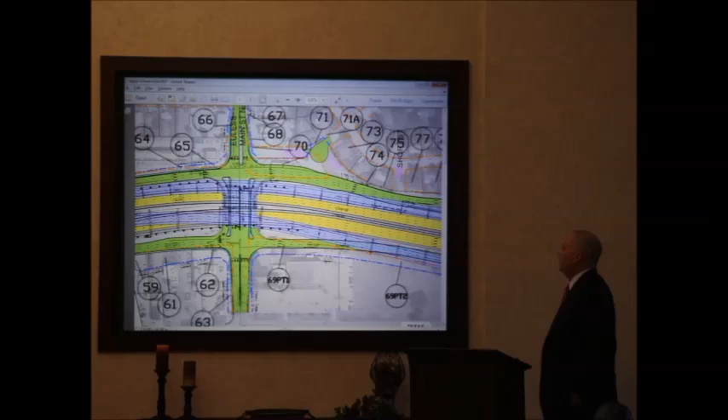Adam, can you go to the schematic for me, please, sir? So we are going to start, and actually, Adam, go back to the west for me, get me to 157 so we can start at 157. That's the second route. Go to the first schematic. There we go. Okay, so we're going to start here, and I brought my trusty pointer,

which is actually a golf club that Jim Moy gave me a few years ago. He said it'd put some pop into my drive. But it's going to work as a pointer today.

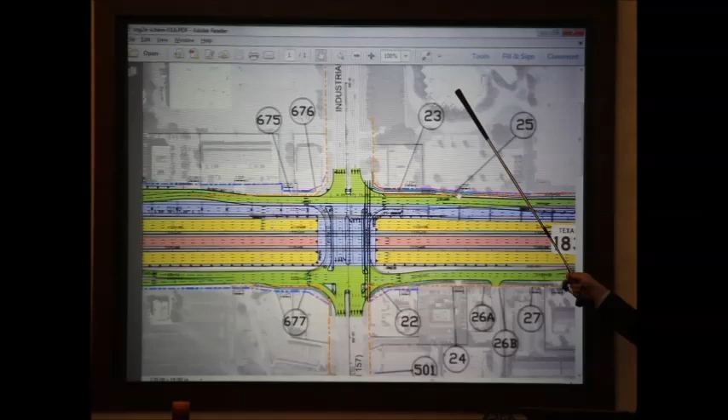We are at 157 and State Highway 183. This is First Baptist Church in Euless. So just to orient you here, parcel 22 is Taco Cabana. Parcel 677 is the cool zone, and that's where we're going to start. Currently, the cool zone has 4 driveways, one in this location, one here, and one a little bit further down, 157. Where you see the blue line is where right-of-way is going to be acquired from that property.

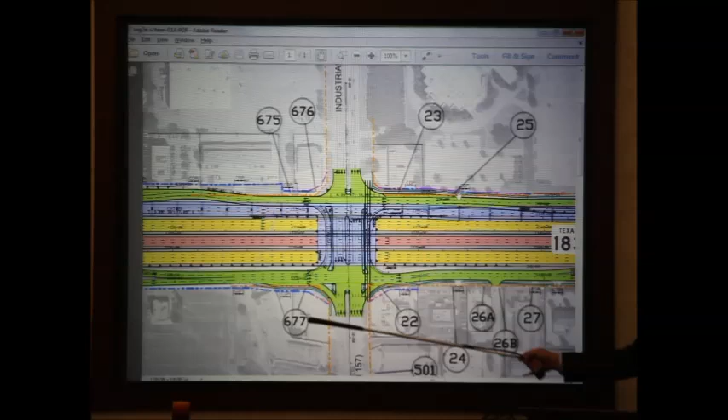As such, TxDOT's proposing to eliminate the driveway here right at the intersection, which we would agree with, it's an unsafe driveway. And they'll also eliminate the driveway here closest to the intersection. But where you see the control denial point access, that is their only remaining access to the State Highway 183 frontage road. Again, Southgate will tell you that they inherited that control denial point from the previous iterations. And so the city's comment here is we're asking them to look at that, and that falls into what we call that yellow bucket, which is they're technically showing that to be closed, and we're asking them to reevaluate that and leave that open.

The obvious reason is we want that property owner to have access to the freeway frontage road. He currently has 4 driveways. We think the way this will play out is, again, we'll make our comment there. And then this driveway down here falls outside of the project. And so what they're telling us is that will be back to local control. So there will be no reason for this driveway to be eliminated. So this property owner in that scenario would still have 2 driveways, one on 157 and one on this freeway service road.

22 Taco Cabana, they've got their access here off of 157, but you can see this key access to them off of the service road is marked to go away. We have visited with Southgate about the fact that those folks worked with the Tarrant County Office of TxDOT when they built that property here recently to basically allow for the freeway construction. You will see that they're taking a little bit of right-of-way, but the right-of-way was planned to be taken, so it doesn't affect their parking calculation or their site circulation. Obviously, closing this driveway would be very, very detrimental to them.

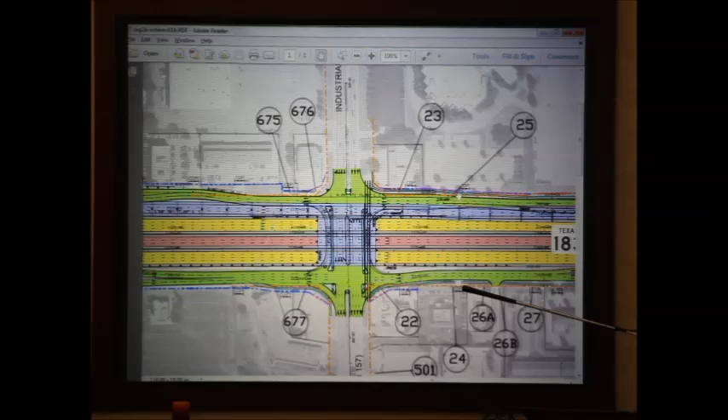If you move here just a little further, and I'll try to go through these pretty quick, I want to point out this very first one here at Denny's. You'll see the CDP again, but it's not where it affects a blue line, and that is because it's a leftover from previous iterations. So there is no issue here. That driveway will be left open. The driveway here that serves Starbucks as well as Home Depot will be left open. And I'm going to slide this thing down just a little bit.

And start back up here at the former La Quinta, which is now the Motel 6. That driveway access would be left open. Lot 28 is going to be the next city comment.

This is the Microtel. They have 2 driveway access points onto the service road. This driveway access point will remain. This driveway access point falls into that category where we're asking them to evaluate the appropriateness. And the reason for that is the shifting of the on-ramp is such that this driveway, we're pretty sure people will try to actually cut across and hit the on-ramp, and that will not be a safe situation. So that has slid to the east, causing that issue.

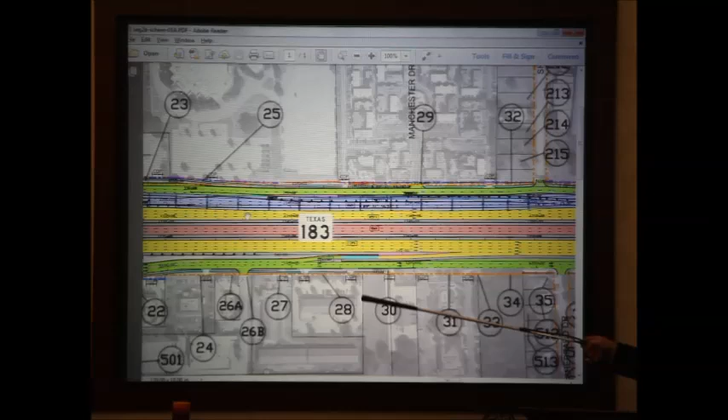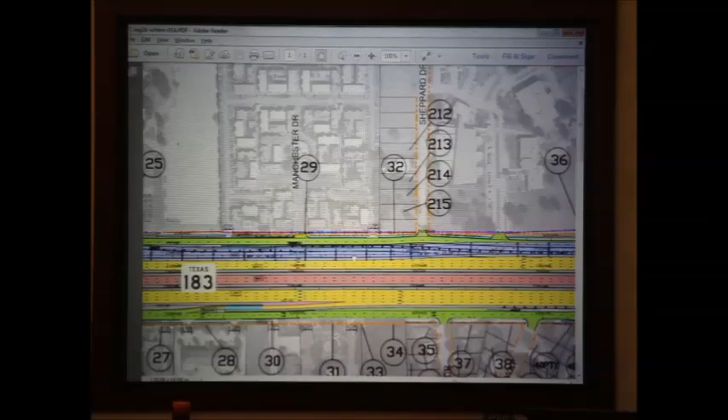This property, because there's a fire lane fully circulating it, can be served by a single driveway, and again, it remains their freeway frontage road access as they've always had. So we're just asking them to reevaluate the appropriateness, and again, when we say that, what we're really meaning is safety of that driveway access right there. There's really not much other effects there south until we get a little bit closer to the corner of the frontage road and Ector Drive. So let me scoot down there.

First thing we run into here is on 42A, which is the Domino's and the Radio Shack building. There is a driveway currently in this location and then here on Ector Drive. This driveway is extraordinarily close to the intersection, but also to, is that Ridgecrest Drive right there. And so they show that driveway to be denied, and we're asking them to reiterate that and look at that. I think that is one where

we're asking them to evaluate the appropriateness of it, but this property, if you see the blue line again, will have right-of-way taking that they'll go through with the property owner, and that will really, really affect that property. It does not actually touch their building, but what it does is it takes away their parking, and they will not be able to park that building for city regulations. In addition, it makes the building too close to the front and side yard setbacks.

And so Southgate will tell you, and there's a little bit of different category, that it may end up having the effect of a full taking on that piece of property. And so really what we'd like to do there, if that's the case, is work with the property owner to reevaluate what's the best way to access that property.

42B has a driveway which actually will be allowed to remain, but there may be some sort of chance that you could combine these two driveways. There may be a way, it's just going to be very, very difficult. If you're familiar with that area, that driveway is so close to the intersection. Just for point of reference, the design standard that TxDOT uses is that you cannot have a driveway within 350 feet of the intersection.

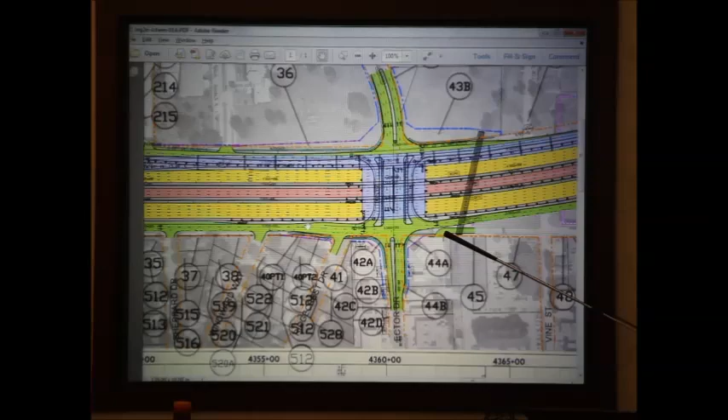Anybody turning here or making these movements is going to be looking at potentially a car or headlights right here. It's going to look like there's a conflicting move getting ready to happen. And at the end of the day, you'd only be separated by a curb right here. So we start to wonder about how safe this is, and potentially what that distance ends up being, if that's going to be two back-to-back curbs, could a vehicle with a long nose actually be reaching over into a different lane, even though they were physically traveling in their lane?

So we've spent some time, and I'm going to scoot down just a little bit further. The city staff has spent some time trying to evaluate the totality of, I would say, 44A, 45, which again is the vacant lot now, 47, and kind of this 48, 49. And it also relates into what we're going to talk about here in a minute on this vacant property up here next to Carl Auto Care.

So, one of the things that we've looked at and that the staff would like to make a recommendation is, because this building is going to be completely damaged out, when you start to look at what that does to building setbacks for future construction on something else coming in there, you start to really get pinched on this side. It's hard to tell here, but you can see this drainage coming there, and that is an open drainage ditch, which you could cover and build flat work parking over, but you cannot build a building.

What you start to look at is that there are some things that may have to happen here. This is either going to have to be a significantly smaller structure, a different use. Potentially, the owner of this property could combine it with the vacant property here, or the owner of this vacant property could buy that property. There's some things that could happen where you could meld two properties into one more developable lot. We think, as we talked about earlier, that there needs to be some access from here onto that property to allow for somebody to even access that from the freeway frontage road.

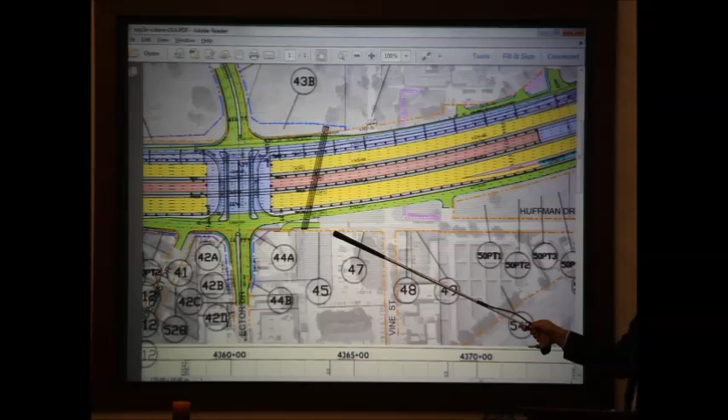So when you start to look at how all that functions together, what the staff has looked at is making a comment that right here where the hand is, the access point to the two hotels, that would be extended to the freeway frontage road. What that does is give both hotels direct access from the freeway frontage road for anybody looking to go to those hotels. This driveway coming out of this property, which again will be heavily damaged, would simply be eliminated. Access to this property would come from the mutual access drive, and what we believe the greatest potential is, again, is for these properties to be combined.

The driveway that comes in to service these two hotels is already constructed and platted as mutual access to lot 45. So that one driveway serves the properties here. What that would also allow you to do is Vine Street, per their plan, and they don't show it here, would be reconstructed back to about this point. So Vine Street would continue to go all the way out to the frontage road as it does today.

That gives Republic Tire and those guys down in that area the same access that they have. It gives Kerry here at the insurance office his same access, doesn't change anything. What that would potentially do, if you extend this driveway out, is it would allow the city, if they wanted to get rid of this portion of Huffman, to in essence create a new front door, if you will, to that hotel property, which when you kind of step back and look at it, we're just trying to say what point does that serve.

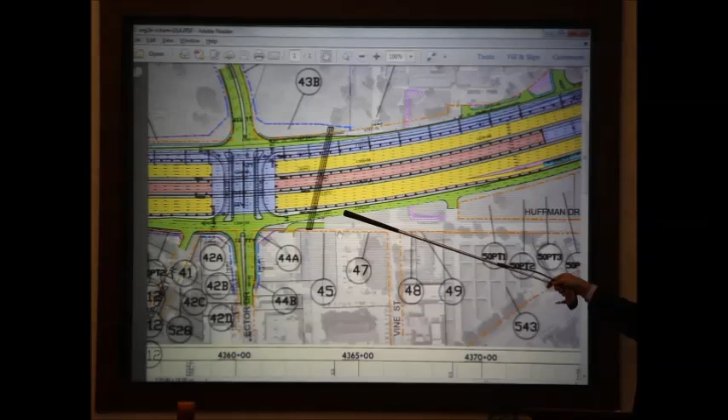So imagine this driveway coming all the way out. You still have Vine Street. Vine Street is your circulation here, and again for these businesses. This piece circulates nicely all the way out to the freeway frontage road. This purple piece represents the existing skywalk to the junior high. That is going away, and so that is no longer going to be there.

You may remember that in early iterations, the right-of-way line cut through Whataburger much more severely, cut through Taco Cabana, cut through Paro Auto Care, and actually came down about like this. What it did is it cut all this vacant property in half and did not leave you a developable lot on either side. It left TxDOT right-of-way on one side and too small of a lot to be developed on the other side. The staff worked with Southgate when they did their realignment.

And because Southgate took this in a little further, and because we asked them to relook at Byers, what they were doing at Byers in the original design was, I don't know if you're familiar with the North Tarrant Express project up by the Church of Christ in North Richland Hills. There's kind of what I call a canyon looking up that. It's got these huge retaining walls when you're just trying to access their parking lot. That's what they had designed here.

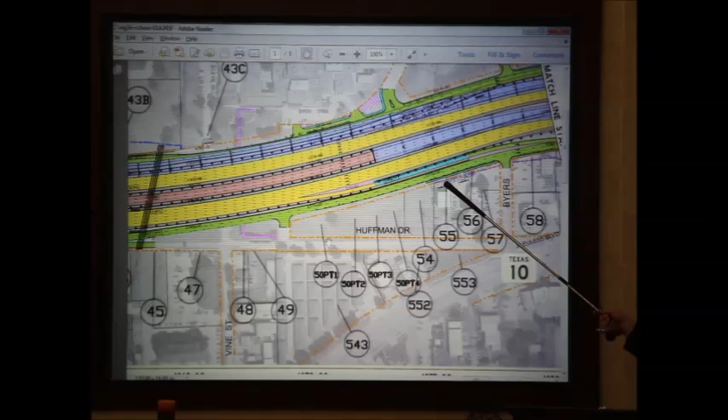Paro Auto Care is now unaffected and gets to stay, so again, one of our comments here is that we'd like to see that driveway remain. This gets into why it was shown as denial of access, because back when these properties were being totally taken out, there was no access needed. So we would ask for these two to remain.

What we are asking for in this piece, which is 50 PT 1, 2, 3, 4, and 54, is that TxDOT would agree to work with the city at a future date to allow new driveway permits to that property, and the city would commit to, in essence, master planning that so that you don't have multiple driveways. Probably in that distance, I'm going to guess that you have 2 driveways. This is not unlike what we've done in many places in the city. 157 at the new Dairy Queen, instead of having a driveway at Dairy Queen and at each additional lot, you've got a mutual access fire lane that's got 1 or 2 points of access.

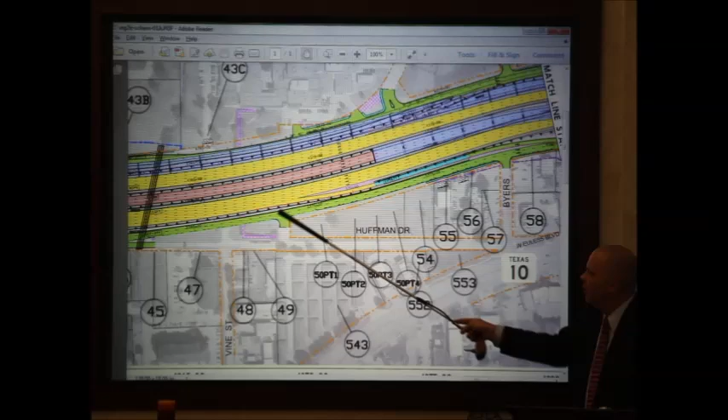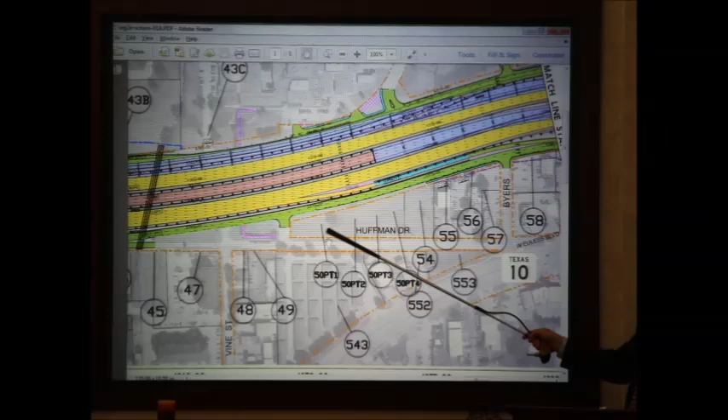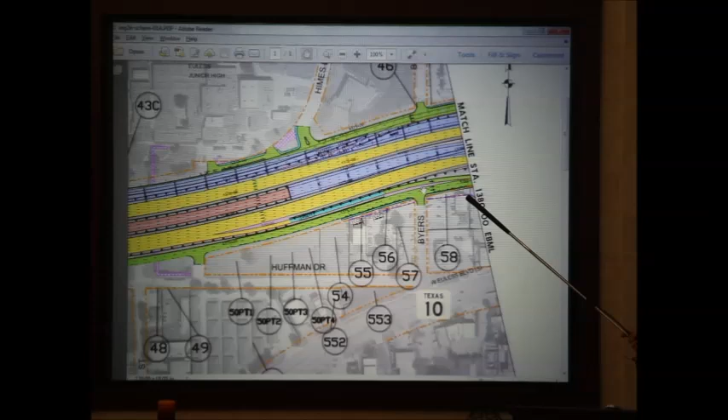This is where the drawing gets a little odd because in one of our most critical points, we have the match line that moves on to the next sheet. So if you look at 58, this is Kentucky Fried Chicken. There's nothing at all going to happen to them. Whataburger will still be a complete taking. You can see the line that actually goes through the building. They will still have their access off of Byers, but the building itself will be a complete taking and be torn down. Adam, can you switch to the next sheet, and we're just going to continue on.

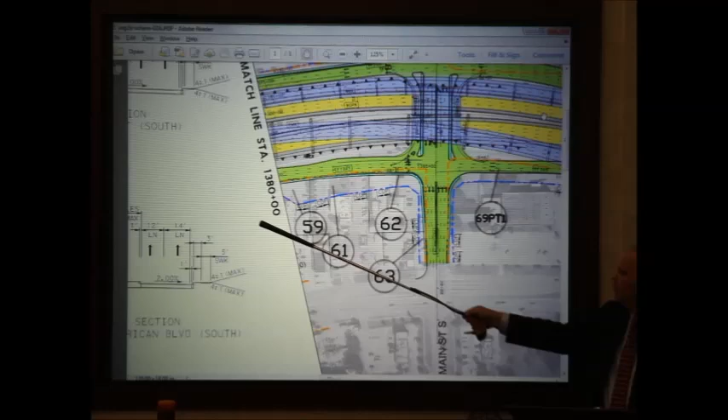Reposition this just a bit. Okay, so Whataburger was just off the screen here. So 59 is Long John Silver's, McDonald's, and 7-Eleven. Between 7-Eleven, McDonald's, Long John Silver's, and Whataburger, there are 7 existing driveways in that very short distance. Basically, none of them meet the criteria.

So what our comment to TxDOT is, and what we've worked with them on, and it requires you to maybe speculate a little bit, is: let's don't arbitrarily go in here and make driveway decisions not knowing how this will redevelop. If you saw at the public meeting, there was a note they had put on the plan that indicated that TxDOT would work with the city and the property owners to locate mutual access driveways there in such a way as to serve all the properties.

The key is, we're not going to have 7 driveways back in that short distance again, but we want to optimize the driveways in a way that you don't put any one property owner at a disadvantage or an advantage as the market recreates these areas. So if you think about Whataburger, it's going away. Mike has talked with the Whataburger folks, and they have a desire to stay in that area. So they're going to be looking at the general area and saying, we've got this land, is there something else we could potentially purchase and reorganize?

We know that the word for many years on McDonald's has been, and of course they own land all the way back to Highway 10, that they would simply rebuild their building further to the south and shift that. They've got 2 driveways now, both right in, right out. Could they potentially function with one larger driveway in the middle and not have any ill repercussions? So the city comment there is not going to be so specific as to say we agree, we disagree, yes, no. What we're saying is let's work smarter, not harder, and agree to work with everybody in the future to figure out the best alignment for the way that property redevelops. There's just so much unknown as to how that property will redevelop.

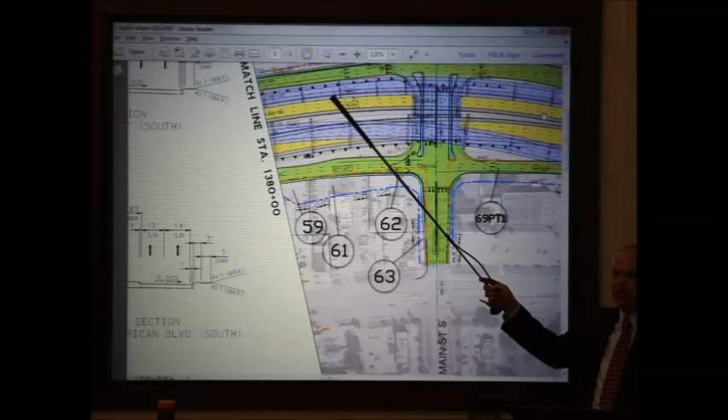Long John Silver's is a complete take. The line goes through the building. I think, Mike, they have indicated they're not 100% sure what they're going to do. They do not have the property behind them where they can, like McDonald's, simply scoot back and rebuild if they want to. Mr. Huda, who owns this gas station here, his canopies are going to be a take, and his fuel tanks, I think sit right here, are going to be a take. So it is highly unlikely that he could maintain a fuel service there. Maybe some other business could happen there, or maybe it has to be combined with another piece of property.

Sometimes when you see highway projects, they will put driveways that at the end of it you think, why is that there, it doesn't serve anything? What we're trying to do here is just make the comment, and they have, I would tell you, tentatively verbally agreed with this, that it makes sense to look at how that's going to develop and redevelop and line up driveways that will optimize ingress and egress to all the properties, be fair to all the property owners, and make it the safest that it can be.

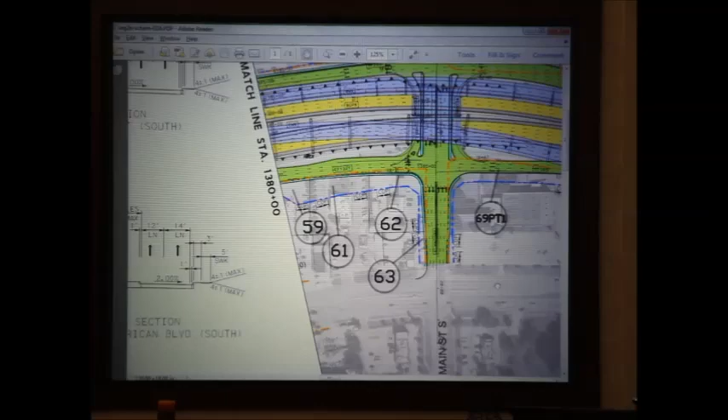The next piece I want to really talk about is the First United Methodist Church here, that is 69 PT1. There is a comment that the city's going to make. There had been some question about how would you access this property if you were southbound on Main Street, now that the design calls for a divided median here, that there's no way to turn in.

What the city did not want is a situation where you had to come to the controlled intersection and turn east on Highway 10 and come down and get into here and try to make a U-turn and come all the way back to the church. It's just kind of an unsafe situation. So what TxDOT is showing is a driveway in this point, and again, it's controlled now.

So what we're asking them is to reiterate what they have verbally told us, and we'd like it in writing, that what they're telling us is they're going to put a driveway in this location that will allow southbound traffic to come to the controlled intersection on the service road and then turn into the church.

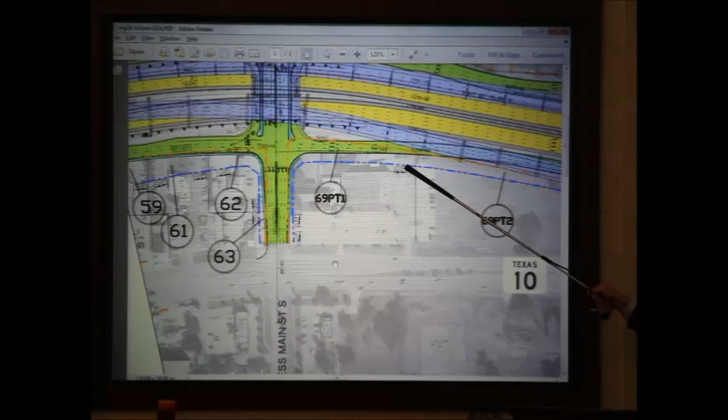Working with the pastor of the church and the building committee, there's some little tweaks to that. For instance, they're showing it in this location, it might be better served to be here so that people don't try to make some sort of a straight cut through to the freeway here. But nonetheless, somewhere in this area, we're asking them to put in writing and reiterate that that driveway would be there. TxDOT and Southgate have both told us that that one will occur because they understand that access to the church.

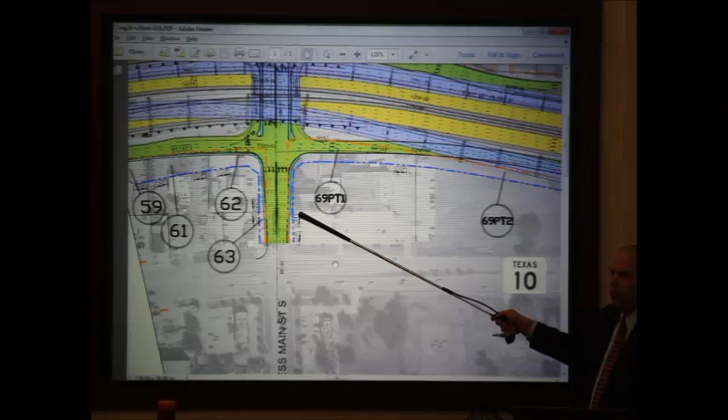The next question I get is kind of on these two driveways that are going to remain, but there will be some different functionality than there is today. You would not be able to turn into this driveway from southbound. You will be able to turn right out and leave. If you were heading back down Highway 10 or if you were heading back up north, then what we would perceive is that you could exit here and head north, and if you're heading down Highway 10, you would exit here and head west on Highway 10.

So we think that this driveway is key to the church as far as how folks are able to get in and out of there. The other thing, we've been working with the pastor of the church, is that Southgate's going to come do a meeting specifically with them to talk about not only that issue, but some of their educational building here is a complete take. Y'all know about the issues with the relationship of the front of the church today to the right of way.

And then the other part is that that bridge, as we reported to you previously, will be out for as much as 18 months. And so we want to have a very targeted meeting with folks. If you wanted to go eastbound on 10, how would, because now you can come out and go across and take a left. How would you go eastbound on 10? You can't do a U-turn there, can you?

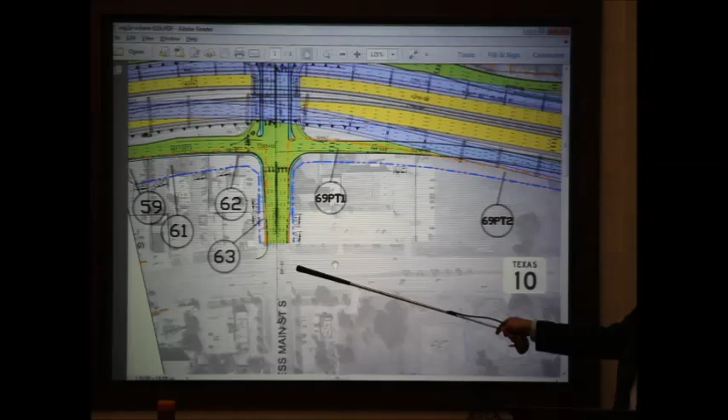It's, let me think here. It's marked as no U-turn. It's not my favorite traffic movement. What you're saying, Tim, now is you can come here and do this. Yeah. But you would not be able to do that because of that controlled median. Yeah. What does that mean, you have to extend so far down? That is a comment that we could make. Here's the fear. The fear is if it doesn't extend that far down, people will do this, make this movement right here.

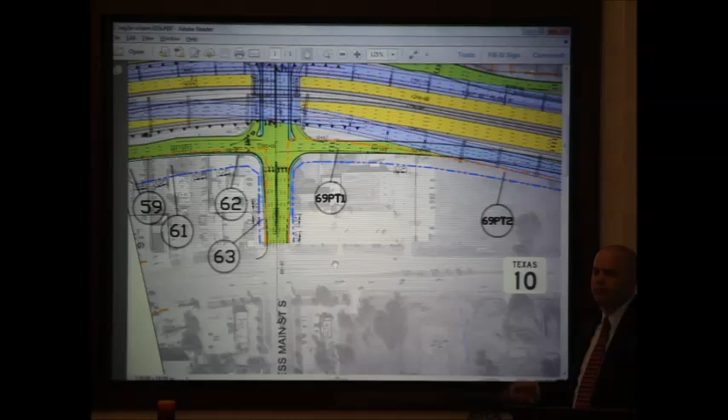And one side of that is that's the movement that's made today. That's what we do today. That's what it's been doing since 1964. But it's because of the distance to the intersection. I think we can make some comments there about that particular eastbound movement on Highway 10. I mean, if you go south on Main Street, it's kind of a weird movement.

They did. And I mean, that may be part of the, back to our time and money comment, but obviously at some point in time, when driveway access can line up with Cullum Drive, that would provide that eastbound Highway 10.

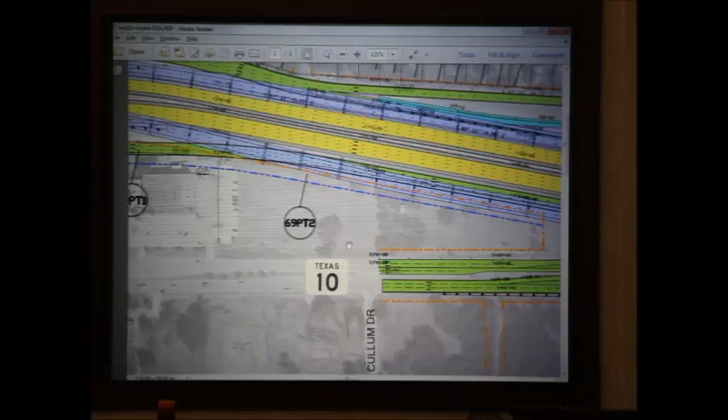So while we're asking questions, what's the grade or the elevation of that service road right there on that drive, north side of the church? It's right now like a pretty good steep. If memory serves me correctly, it's not significantly different than what it is today.

Now, one of the things that's a little different in this schematic that's kind of hard to think about is we always talk about the interim project, and that's what they're building as part of what we know as Midtown Express today, and then the ultimate. And the ultimate is the addition of additional managed lanes. The interim project will have one managed lane in each direction. The ultimate project ups that to 2 and even potentially 3.

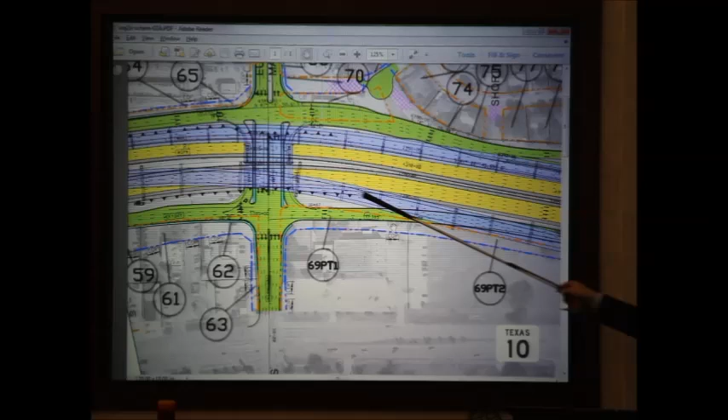What you're seeing in these schematics is the ultimate, because you see these little rectangles here. That's actually elevated structure where the blue lanes are the ultimate managed lanes. The thing I like about that is, as you look through the corridor, what we're looking at is how the ultimate project will affect the corridor.

And one of the things that the city has stressed with TxDOT and Southgate, and we've got them to acquiesce to, is that they are acquiring the ultimate right-of-way today, even though it may not necessarily be needed for the interim construction. And the reason for that is nobody can tell you when the ultimate will be built. It could be 3 years from now, it could be 20 years from now.

And it just seemed in our mind unfair to the citizenry to come in and potentially have acquisition, et cetera, and at some point in time in the future, you would always know that you'd be subject to potentially further acquisition. So this is kind of to pull the Band-Aid off quick one time and take the right of way that you need initially.

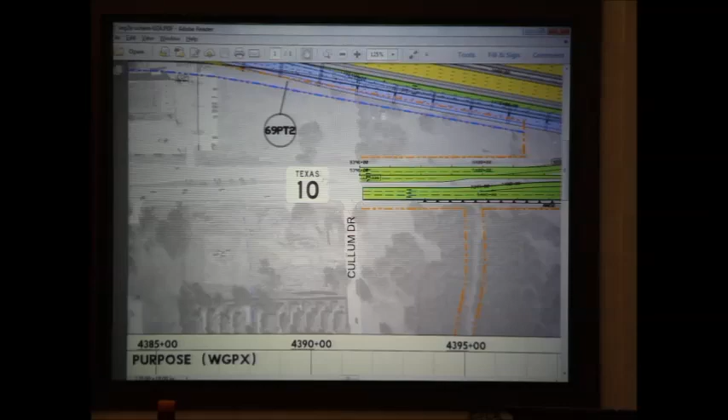Third thing I want to show you real quick is if you come down here a little further, it's easy to miss because this is on the very eastern end of Euless. And one of the things we pointed out to them is they've actually got this label wrong. Aries is actually right here. But in the ultimate, again, not the interim, but in the ultimate, they're showing that to go away.

And the comment that we're making there is Libra Lane here is designed to function with that. It's not designed as a cul-de-sac with, what's the radius these days, Chief? A large radius cul-de-sac. So if you simply took that away and left that as a street, we've got a concern about particularly emergency response equipment's ability to get there. So we're saying, hey, reevaluate what you're doing there in the ultimate versus the interim.

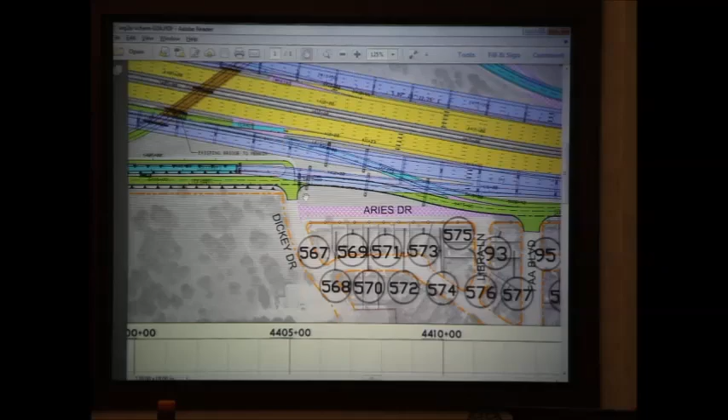If I move to the north of the road, there's a little bit less of an effect for us. One of the things I want to point out here is this is the Riverwalk project. They are going to make a comment and have asked the city to support that comment, and as it is right now, we would do that. Today, you can exit eastbound or westbound 183, and you can exit and come off right here. And this service road is two-way traffic, so you can turn right back and get back to their property.

What TxDOT was indicating in the interim is that this became one-way traffic, westbound only. And so Riverwalk's point was you've effectively eliminated any access to our property short of going up 360 and doing some things. And I guess if you have really good local knowledge, you can exit Main Street, go up Main Street, come down and do some things. But you've effectively eliminated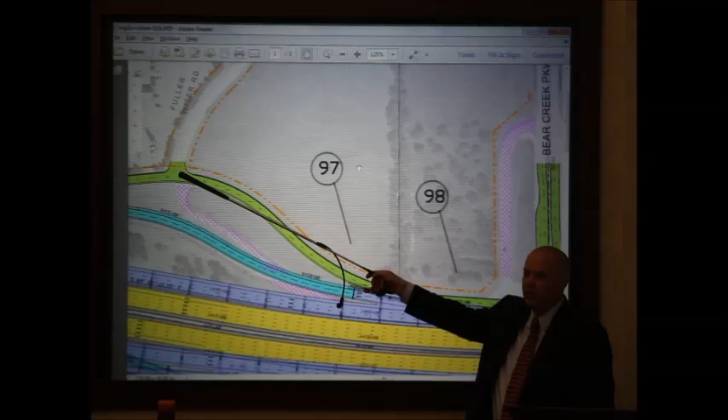access to their property. So what they talked to TxDOT at the meeting about, and again, TxDOT thought was a good idea, and the city would tend to support, is in the interim, not making this service road one-way, allowing it to be two-way from Fuller-Wiser back to the east, which provides access to their property. And from Fuller-Wiser to the west, it would be one-way, and that's because of, I can show you as we get closer to Main Street, how that has to function.

One of the first questions you might say is, well, how do you do that? Well, it's through signage and through a specifically shaped median teardrop opening right there, and then as you took this exit, that's what you'd really be able to do, is to turn back that way.

Now, in the ultimate, it will be one-way traffic, because in the ultimate, there is a flyover connection that allows you to reasonably get to that property, and the Riverwalk folks are comfortable with that. They're just saying, in this unknown interim between ultimate and interim construction, don't leave us where we can't access our property. So the purple hash marks go away. Purple hash mark is indicating, again, this is the ultimate schematic, pavement going away. So in the interim, that exit will still be active. In the ultimate, that exit's not.

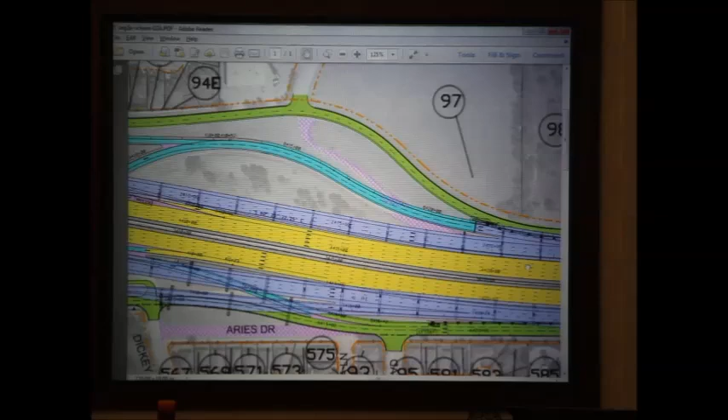Let's see if I can do this a little bit, try to do something. Adam, move me down to Main Street. This thing's got issues. Yeah, that's good enough right there.

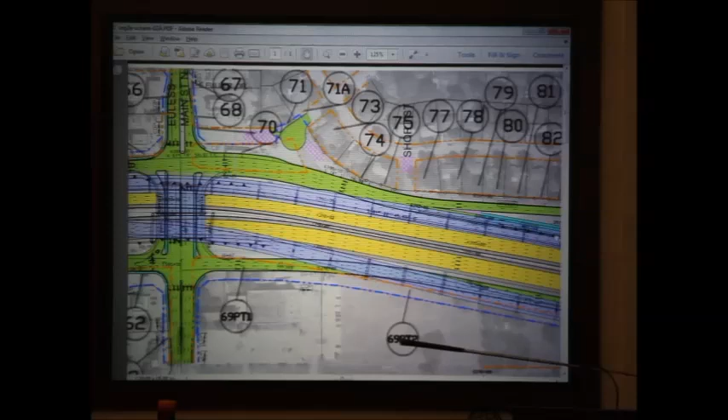So as we discussed earlier, Short Street in this location would go away, and we'd have sound wall placed in this area. 70 is Wendy's. It is a complete taking, and as you see, part of the roadway is actually in Wendy's. This portion of Fuller, East Fuller Drive, is intended to go away as part of that.

68 is Jack in the Box. It gets real interesting. The right-of-way take that they need for the widening of Main Street to line the bridge back up is going to take out all of Jack in the Box's front parking, which is going to put them in violation of our parking ordinance.

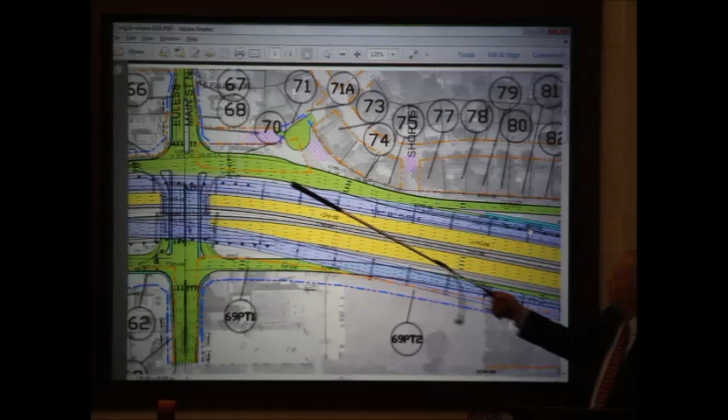In addition, it's going to eliminate their access to Fuller Drive, since Fuller Drive will no longer be there. And that currently is how their fire lane is platted, to a joint driveway here coming down to Fuller. So what the city would be doing is, if your fire lane goes away, you've got to account for that somewhere. They can replat and rebuild a fire lane to circulate the building.

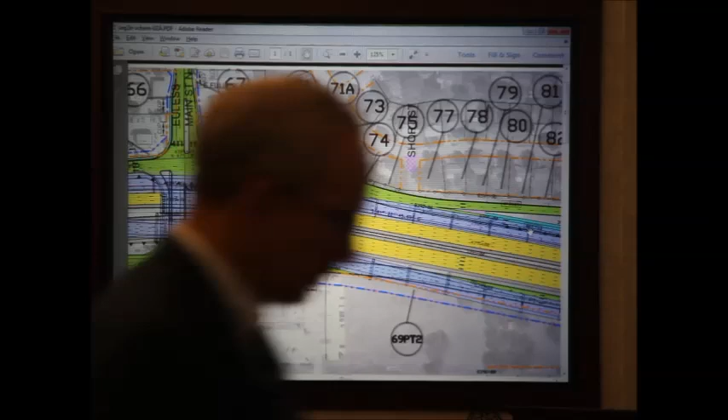The problem with that is, that's where their drive-through circulation is as well. So we don't believe there's enough space there to adequately serve fire lane circulation and drive-through. So I can't tell you what's going to happen to that property, but they've got some pretty good choices to be making there. That's one where TxDOT and Southgate will tell you that it is not a true taking, because they're not taking part of their building, but it's a functional taking.

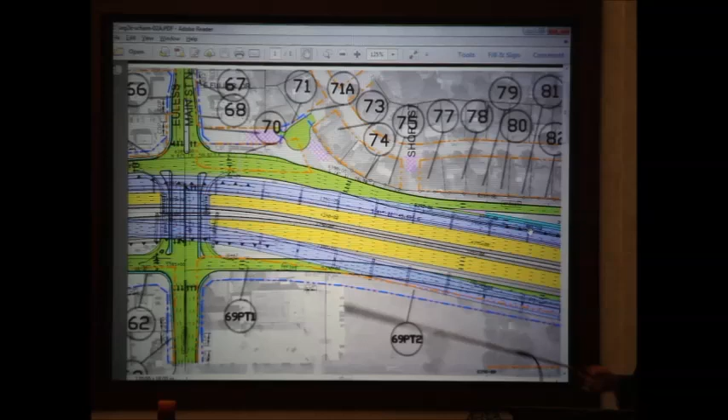The property owner will most likely argue that the effect that you had on my property, I can no longer operate my business for the reasons that I just talked about. So what that leaves you is we believe that there's some opportunity for the market in that kind of general area there to do something differently.

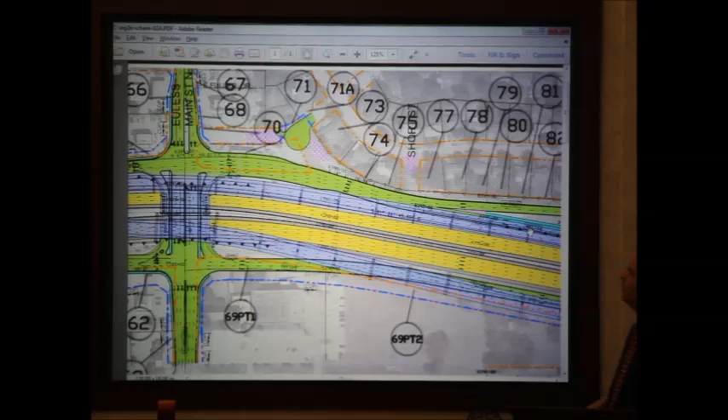We will comment that they will verify that the control access point here would remain open. That's what we would propose, instead of adjacent or straddling the property line of these two properties, and that's as it should be. And we'll go slightly further to the west for me, please. That's good enough. So the gas station here at 66, the Starbucks at 65, and the Motel 6 at 64.

There are two driveways on the gas station, one in this location and one shown here. Our comment there is going to be basically that they're closing one, and we're going to be talking about which one is most safe to close. You would say, well, maybe we leave this one open, but if you remember, there's West Fuller Drive right there, so you're trying to get some distance there.

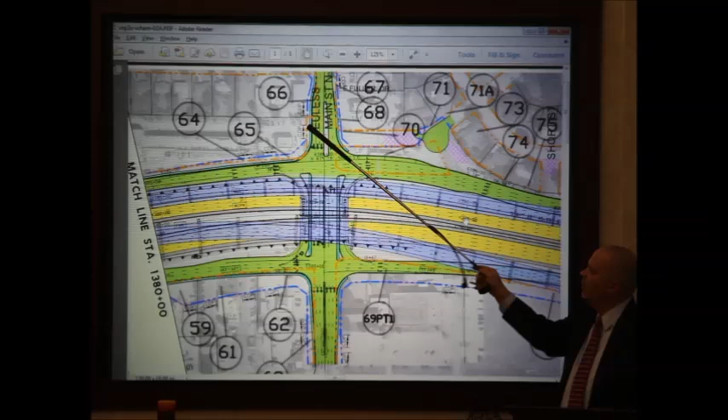These two driveways, Starbucks will be a complete taking. This will take enough of their property to cut off their drive-through, and you can't have a Starbucks without a drive-through on a going-to-work corner. So I think there may be some opportunities where these properties kind of get recombined in some way, or potentially even these properties get recombined in some way.

And so what you're going to see in general is not these adjacent driveways; you'll probably see that combined to serve both properties. You may very well see this come before you as a new development with a replat, and you're platting two properties into one, and we can deal with the driveway access at that point in time.

Motel 6 is going to, you can see by the blue line, lose some property. It does not get into their building. It does get into their fire lane. They cannot provide additional fire lane short of getting rid of a portion of the building. So I think you ought to look for something happening in that area. They're going to have to somehow accommodate the loss of that fire lane.

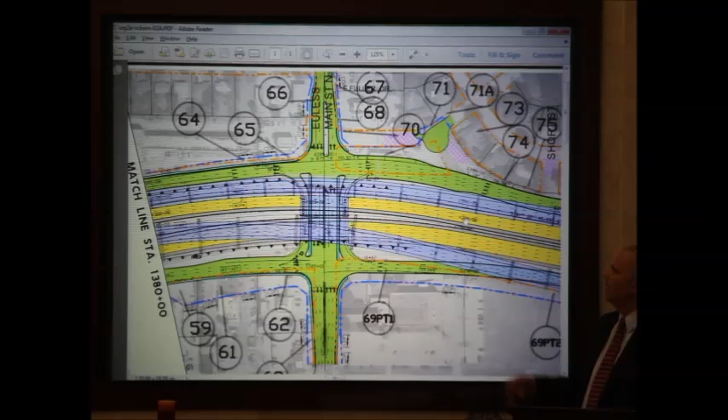It's going to provide some opportunity here too. And again, the city's not advocating here or anything, but I'm just speculating. If Motel 6 had to lop off part of their building, they might have some additional property that these guys might be interested in. Maybe there's a way for them to work together and they both benefit from that. In an instance like that, what you probably see is these two driveways go away and be combined into one driveway that serves both properties.

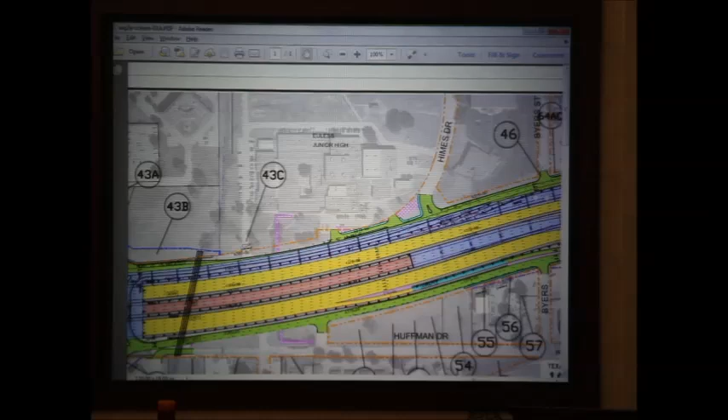Adam, flip back to the first drawing, if you will, and take us to Main Street. That's right there where it is. There's not a whole lot going on for the city to comment here on the north side as we come through the junior high. Again, the pedestrian sky bridge is going away. Chris, can you go back to the... Yes, sir. We talked about some stuff in that area, what? So they're not gonna take away either parking here, they're gonna take away that little...

Yeah, they're working with the school to redo something here, which in my mind, what they're trying to do is kind of a parent drop-off / bus area. If you go in there today, when people are dropping off, they're parked on the service road, and it gets pretty tight. They're trying to get them off the service road and give them a place to pull into.

And again, it's a little harder to see here because you're seeing this blue, which is the ultimate. In the nature of these drawings, you can't see down through the layers. But the school district is actively working with Southgate TxDOT to try to mitigate that issue that they have right now. So I don't know exactly how it'll look, but it'll be better than it is today.

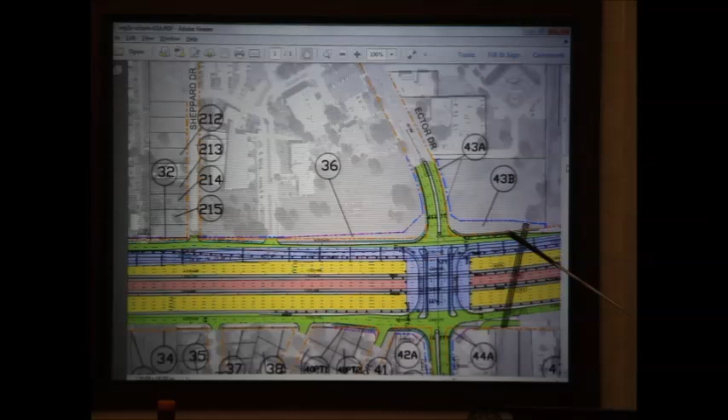43B is an interesting lot. They're not showing any access. There's no access today, so that's why they're not showing any access. But we'll probably try to come up with some type of comment. In theory, you can access the property from this, but there's some question over how that was platted and dedicated and who controls that. That has always been an issue for the development of 43B.

The other thing about 43B is it's hard to see here, but there's gas line easement, and there's some drainage easement. It is really diced up with some easement property. But we're going to be looking at that, and it's one of those where they're not showing any access, but then again, there is not a driveway access. They're not denying any access. So what they're showing is maintaining the status quo.

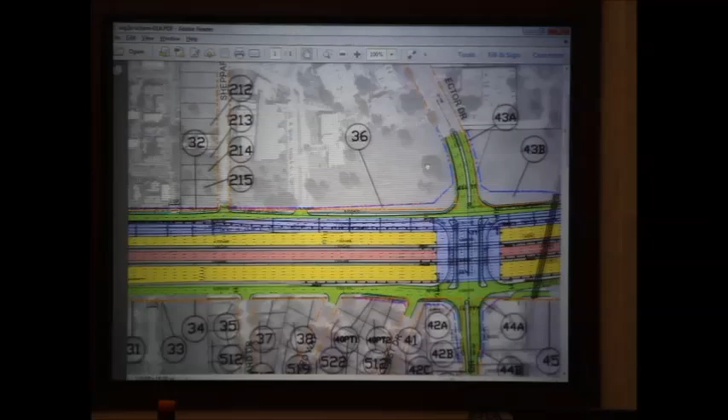Go back by the city property. They're again proposing to tie in the Spine Road and Sheppard Drive. There's a comment that we'll make here that they've already said is absolutely the case. We'll make the comment anyway, where this access point and this access point to Manchester will remain. Part of that had to do with, if you remember, the initial iteration was wiping out that whole front row of buildings because this right-of-way line was moving back considerably.

And so I think at that point in time, the way they thought this would function was this would turn in and you'd have a central point. Because that's no longer the case and they're really having no effect to the Manchester property, there is a little right-of-way they're taking, but they're not getting into any buildings or parking or anything. These drives would be left open along with the middle drive.

We did have a chance to visit with them about the sound wall in this area, and it's interesting what they said. We were talking particularly about the aesthetics and how that might look, and the answer that we had provided about the overall aesthetics package and the city's ability to direct our portion, if you will, within our city is absolutely correct, and that could be applied to the sound wall.

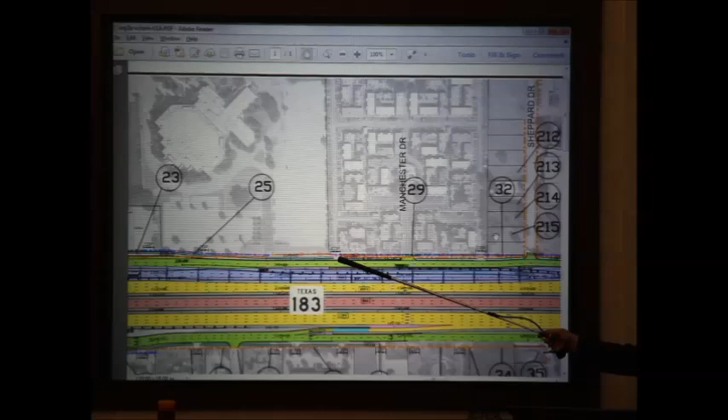But the other thing that they started to talk about was that the sound wall can be influenced by the owner of the property as to whether, even if it's required as part of the environmental clearance, if the owner does not want that, they could have some influence over that. In a typical residential area, they're not going to go in, this guy wants it, this guy doesn't, and have a patchwork sound wall.

This is a unique situation because it's a residential property, but it's a single owner because it's a multifamily property. And so they will make that property owner aware of that. And they stopped short of saying that they had full control over whether it went in or not, but they indicated that they had a lot of influence as to how that would be done.

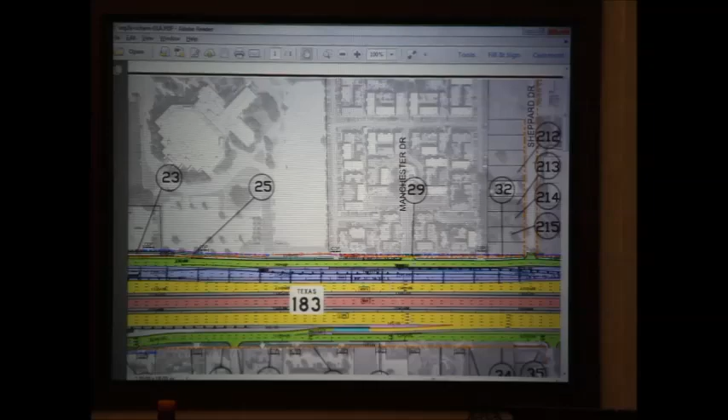Moving down past First Baptist Church and back to where we started, we're going to make a comment. They've shown a no control access point, no driveway there today, so we're not really sure what that is. They show a no control access point here. The city will ask that that remains open. This driveway off of 157 will be shut. This driveway off of 157 will not be.

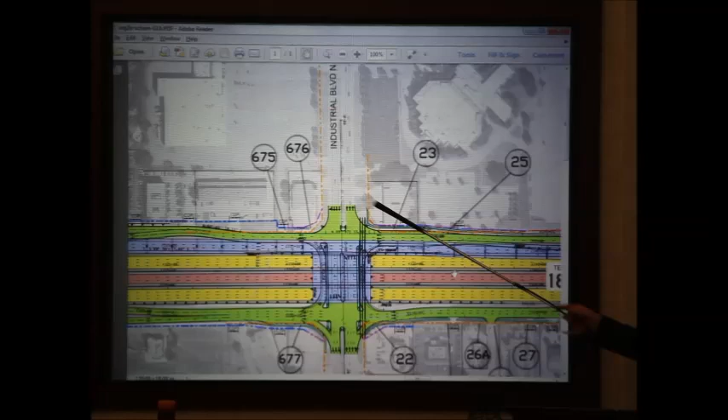So this corner property will still have their two points of access, similar to the Cool Zone where we started over there. You're going to eliminate some of the driveway points, but you're still giving the property owner access to the... Number 23's tanks are in the back, I think you're right. I think their issue is that they actually don't. It gets real close as to whether it gets into their canopy line.

I don't know if we've heard from that property owner what his overall thought is. Sometimes a property owner, we've seen occasions along the corridor where, even if it's not a full taking, they may decide to take whatever money the state gives them and move on down the road and do something else. And I don't know. I haven't had a discussion.

Correct me if I'm wrong, Mike, but that's Mr. Huda that owns it. Exactly. We talked to him Thursday, and he's just not sure yet. Okay. He owns actually three businesses affected by this. He owns up at Main Street, the 7-Eleven across from the Methodist Church, and is it the Chevron, I guess? Just north of the Starbucks. So he's going to be well into this project.

What are our expectations of medians and how are those going to look? Do they carry monument signs with them? Do they look like the medians in Mid-Cities and Industrial? Or 157? They get some of this in the aesthetics package, which we have not even seen yet. Okay. And I think we would have some ability to direct that, and we're going to obviously want direction from you all.

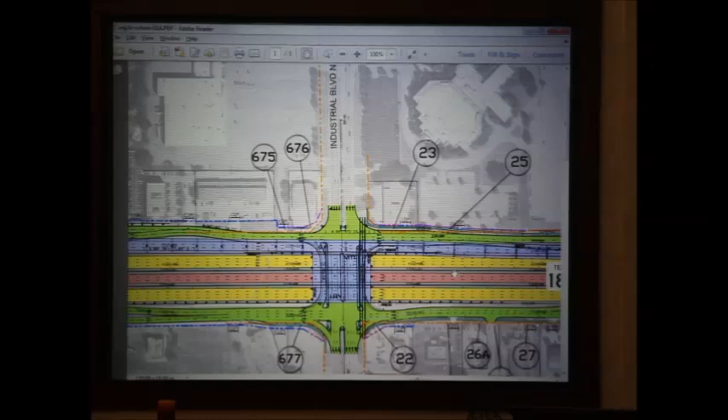Any other questions for Chris on this topic? You're about 45 minutes, right on. Good job. I almost get it. So there are no more questions.

With no more questions on that, Chris and Mike will be preparing those comments and getting those ready to send out next week or later this...